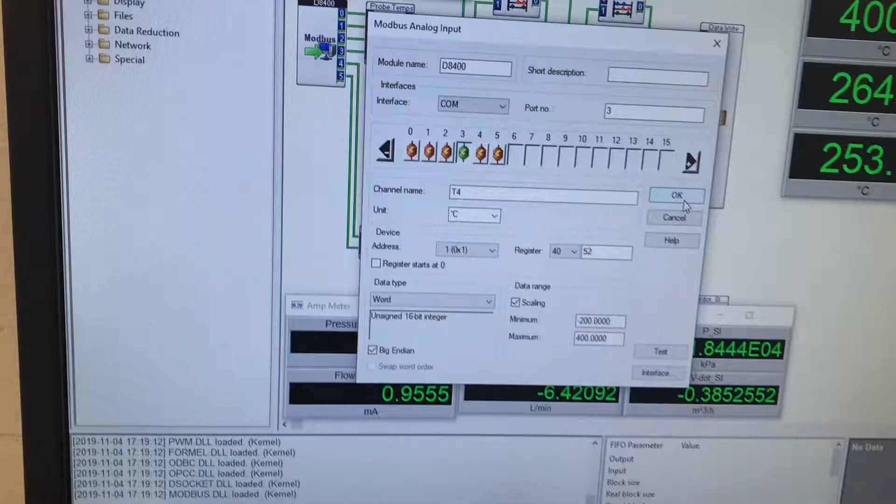Alrighty, this one is more geared towards Omega's engineers, because if you'll see here, that is what it's reading, well, what it's supposed to be reading. My thermocouples are absolutely just messed up now. They're in metal unions like that with Teflon tape. They were like that before and reading fine. I seriously do not know what is going on.

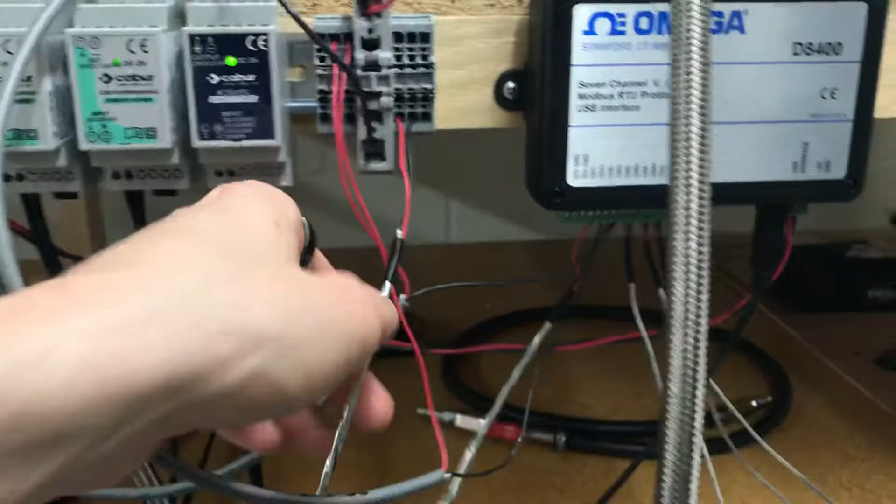This is the power supply that does my loop power. So you can see here, it's essentially got the two leads that come in, and from there it would bridge out. And this might be the issue. Like I keep saying, I'm a mechanical engineer, not an electrical engineer, but as far as my knowledge, there's one power source that these are being bridged off of in parallel. Not in series, because it's not one after the other. It's all related to the same power supply technically, but bridging off from it and then terminating at the channels like in that email.

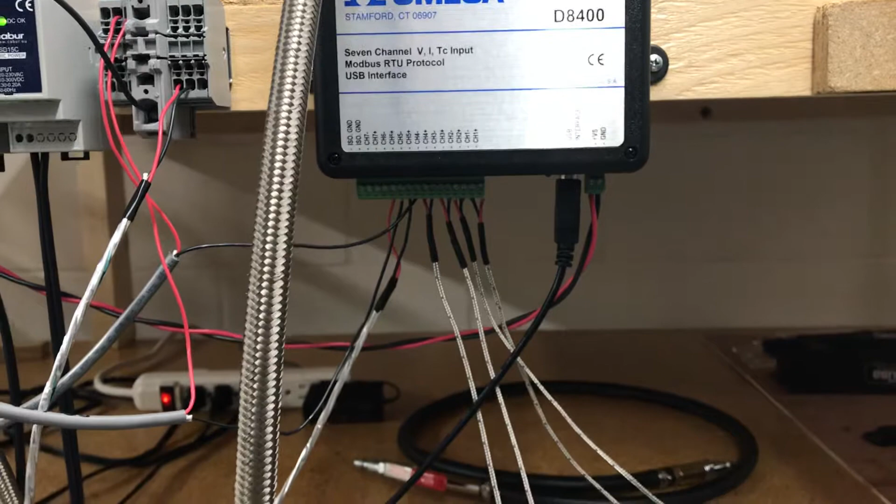Which basically, if you Google National Instruments wiring 4 to 20 milliamp in parallel, you'll find figure 5 on that article. That is pretty much what I was trying to emulate.

But still, you'll see here in a second, just some wonky stuff is happening because, as you can see here, these three are hooked up as was. Now I did take them out and put them back in because I wanted to refresh stuff, make sure the wire connections were good. You can see here I've done some debugging. Tried to just swap to see if I could get anything to happen. It's ridiculous that nothing is moving because all my values are set at full scale.

And I'm over here looking at these ridiculous instructions that don't make any sense. I mean, this is an engineer thinking through it, right? So you've got a minus 20 to positive 20 milliamp, thus your hex values, I think is what those are. So technically I've got a flow meter that'll go from 1 to 40 liters per minute within this full scale range, but really it's 4 milliamps when it starts, so that's zero, and then that's my data points I need to put in. What I've been doing, it still will not read right. This stupid stuff is unbelievable. How you can literally have a black and white instruction in here that doesn't yield a black and white result for these same instructions followed.

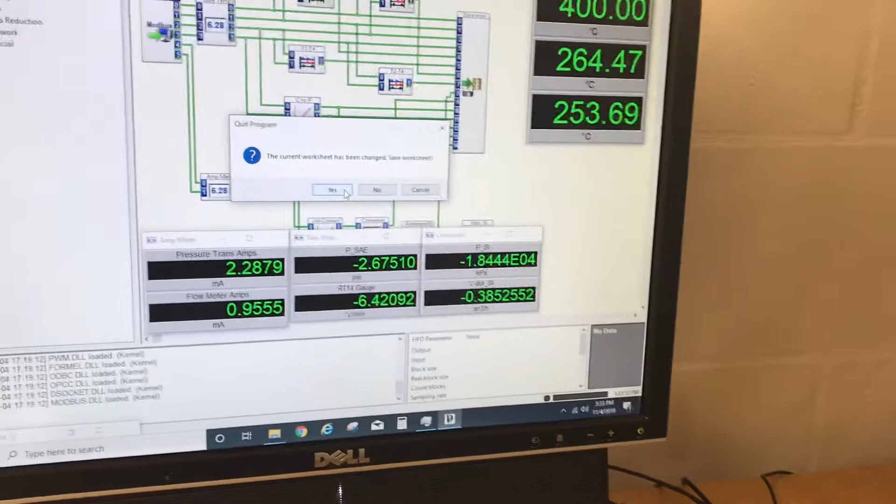Alright, so you can see here that, yeah, let me do this first. Close that, because I need to show you guys, especially for the Omega people who are going to watch this, that it's already added, it's in the correct registers and functions and slave address. For God's sakes, this is so stupid. This stuff doesn't do anything that relates to this other window that I'll show you. This doesn't work, Omega, thanks for that.

So either way, if you were to come in here, click that right here, basically you press setup to do this, but I'll show you that my computer does talk to it correctly. I had to mess with this and put it to 0, because it will not talk to your computer otherwise, which is, you know, there should be a fucking red text for that. Do excuse my French. These people who write manuals are just clueless.

So you can see that it reads setup here. Sweet, so it thinks it knows what it needs. Omega, you guys need to get on your stuff. It's a plus or minus 20 milliamp circuit. I get that you're using the 1 volt to understand the current reading, but man, what the hell, you know? What are you doing putting this in here? If it reads it, even though it's a loop power device, it's on a plus or minus 20 milliamp circuit, so this is the way I want to do it, right?

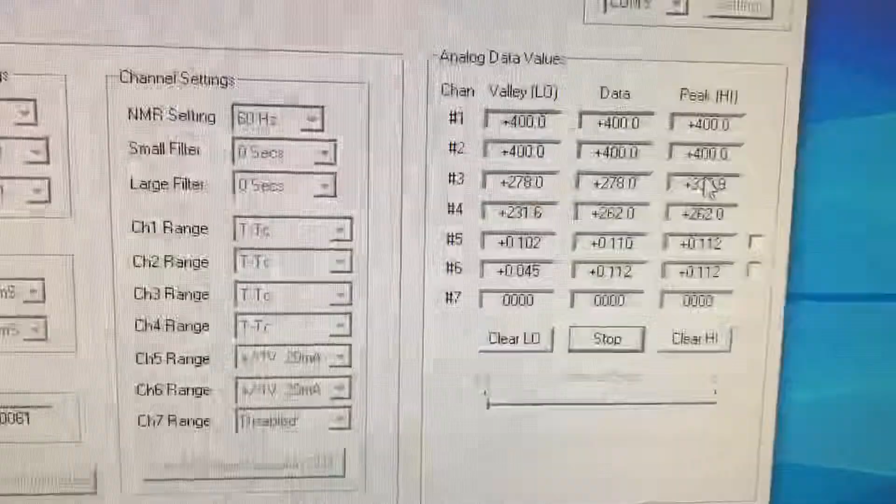So once again, we'll read the setup again. I'll show you what it reads with that. The only thing that really happens anyways is that you can curtail this. So as you can see, my thermocouple 1 and 2, now number 1 is the one where I did the swap wiring on. Number 2, no clue. Number 3, number 4, just literally no clue what those stupid piece of garbage thermocouples are doing, even though they've been put in the same freaking way. So you can see that if you check this, it sort of changes it in a sense.

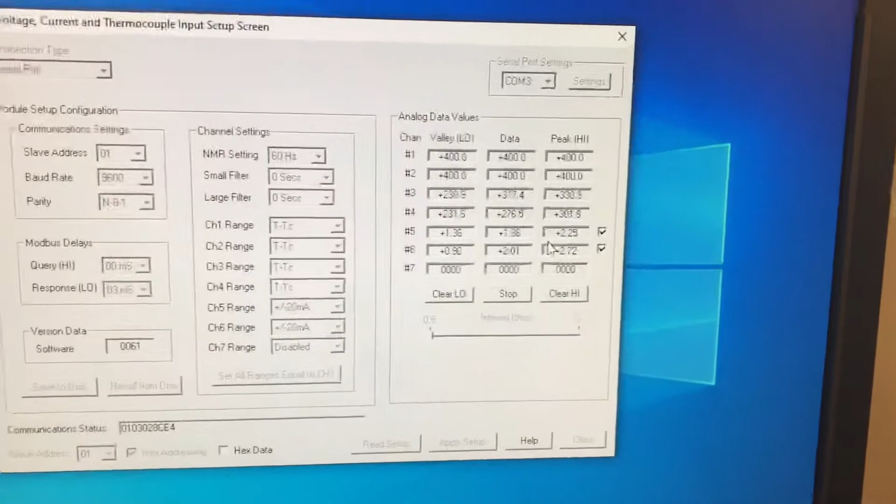See those over there, they've changed a little bit as well. So it changes this to what I would assume is the correct, because there's no instructions, because they're idiots, remember that. Well, the people who wrote it; I'm sure the people who are helping me aren't going to be idiots, because the people who wrote it hopefully got fired because they suck. But I mean, I could tell what it does, but it'd be cool to tell with the documentation anywhere, which doesn't exist because it's not on this disc.

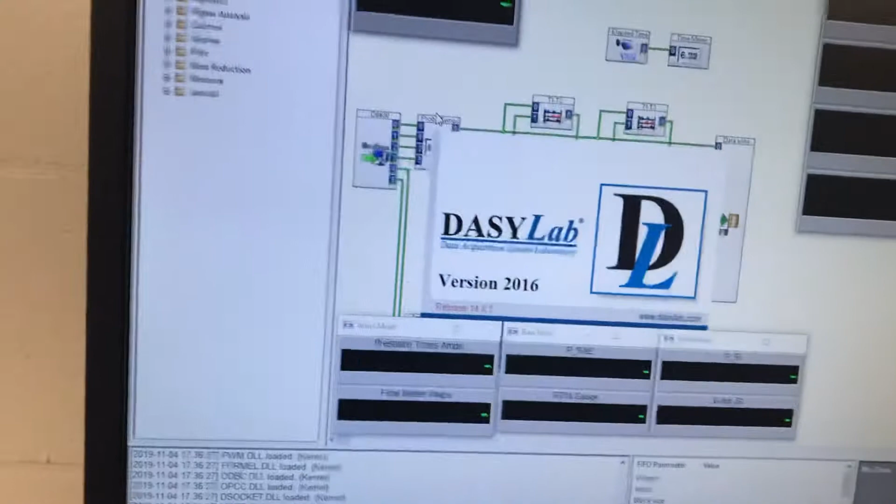Oh, man. So, you can see that it works. So, close that. Exit that. We know it's communicating correctly, right? That's not the freaking issue. So, hold on real quick. Open this up. So, alrighty, so I'll go back into here.

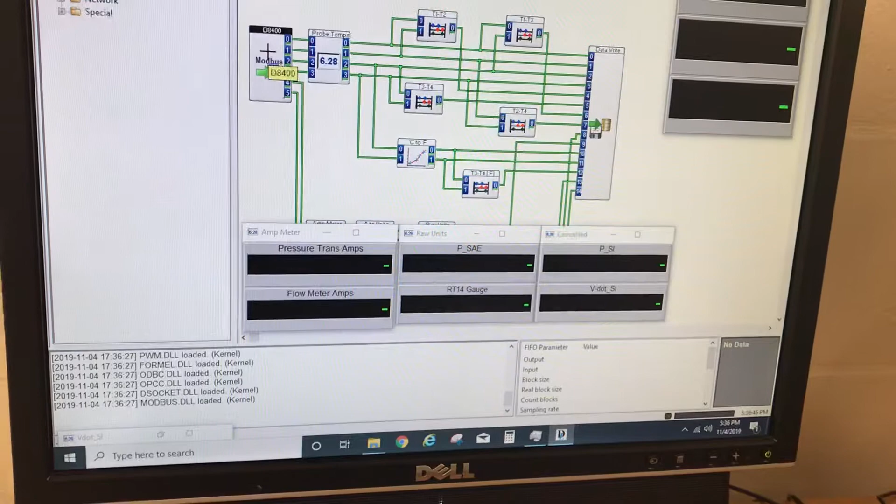You know what I forgot to, you guys probably saw it on the window, but the response rate was 0.3, or 3 milliseconds, whatever, which I can't change, which is really weird. I thought I used to be able to change that. According to this, I should be able to change that. When I put it into the program function, it just fucks off. So thanks, Omega. But your instructions, once again, are useless.

You can see here, once again, nothing crazy. Sampling rate might be a little high, but I really don't think it is, considering the fact that this is engine oil. For the figures that they were able to give, it's got 0.6 response time in water. So water is very conductive compared to oil. So I don't think that, for example, 2 hertz sampling frequency is going to be too bad. That's 2 measurements a second, if we're all following me there. So I was a little bit worried about that, but here, once again, when we come in and test, what the actual hell is going on?

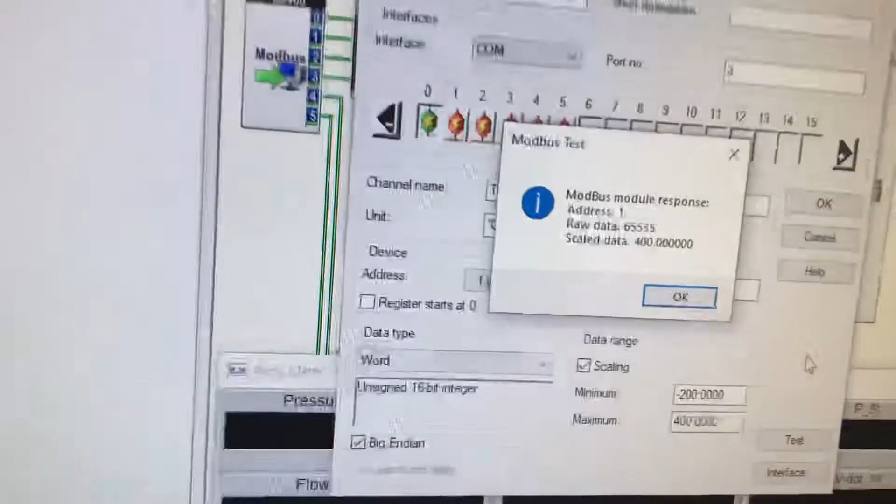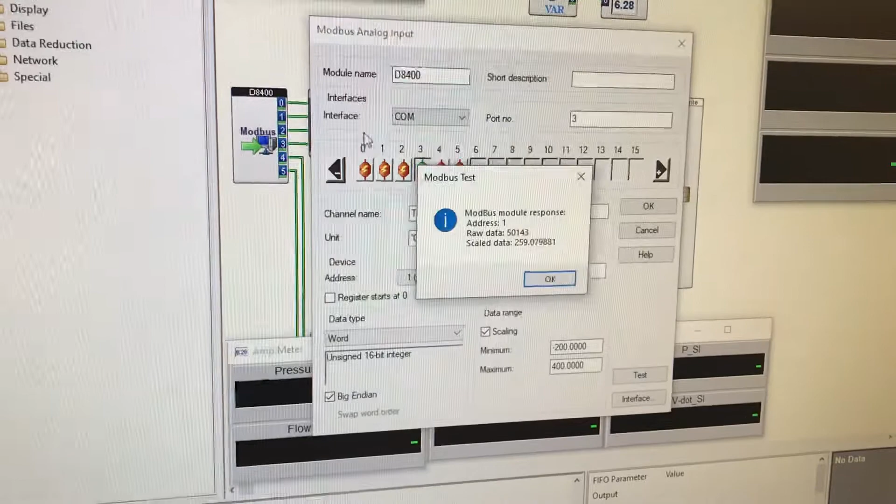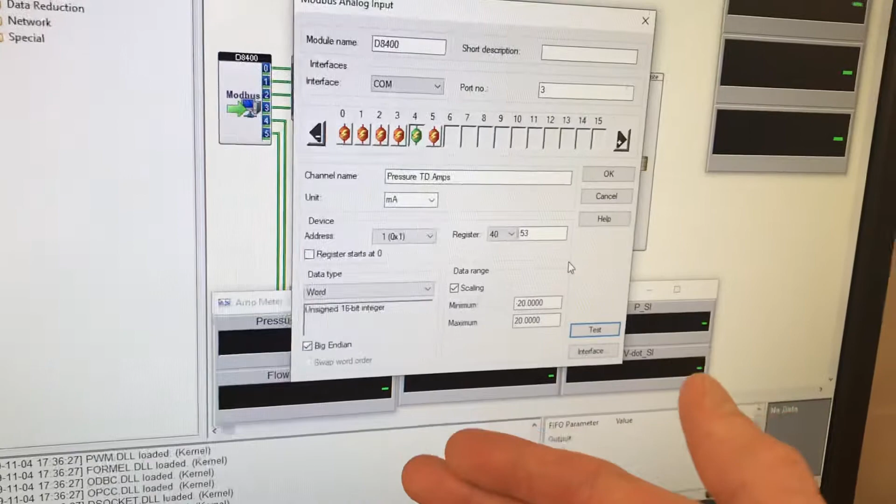So, see, once again, you can look at the raw data hex and the scale data unit maxed out for no freaking reason. And basically, if you're wondering why I'm so kerfluffled at this, see, these other ones, whoa, still really hot. Starting to at least read a different freaking temp. And then these milliamp ones, because it works on a plus or minus 20 milliamp scale, right? So how does that actually make sense? That's what I want to know. How can you put the scale in, and it doesn't give you a, like,

I know it's not being actualized right now, but look, I could turn this on. And we can test it. Of course, it's probably not going to do shit here, but look at how long it takes to get on now, too. This is way longer than it used to be. 6 seconds in, these still aren't reading. So, if you look at my amps, that's a lie, because it's turning more than it was, which was 0 before, and who knows what that's doing, because who knows if those are right.

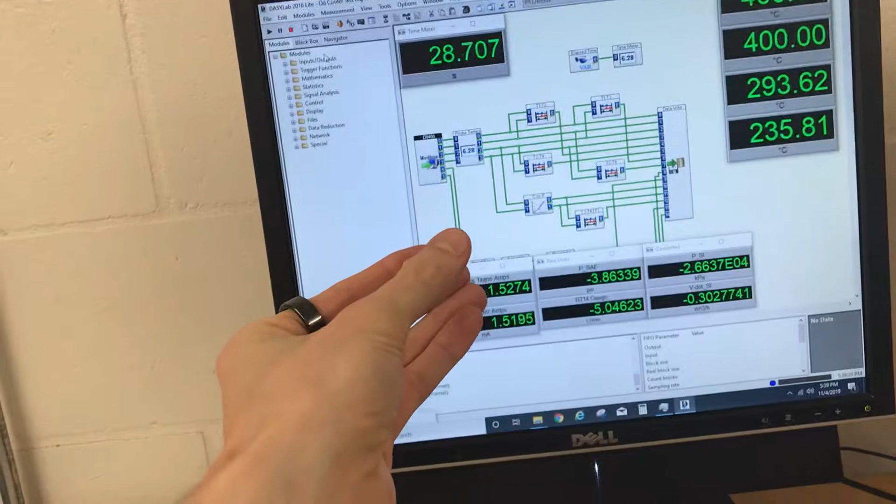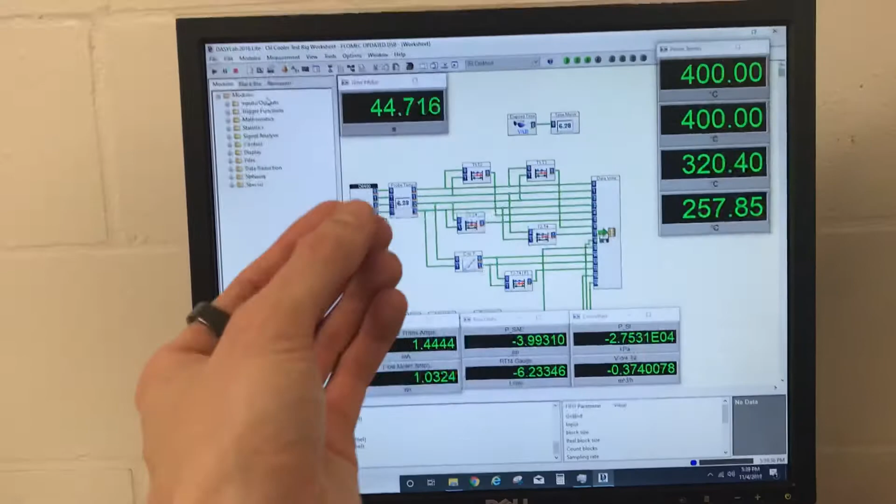Point being, though, once again, the instructions that Omega has said just suck. They suck. So, I followed black and white instructions as an engineer. I'm very freaking smart. I'm not an electrical person, but I know what the hell I'm doing if I read instructions that are well written. So, what is going on here? This is insane. Of course I have the jumpers installed. I'd have to take this off. It'd be a waste of time. But there's literally no explanation for this crap.

The thermocouples, the current, and all I did after it was working correctly was this power strip was moved from being plugged in over there to now being plugged in back over here, because that breaker is more robust and it has to handle this heater and this giant motor. I blew the breaker. The computer was still running last time. Now, the other funny part, when I was doing the experiment, every single channel pinged to max. I don't remember what the amps were doing. They're pieces of crap anyway.

So, it's unbelievable to me that anything like this is happening, because like I said, you've looked at the black and white instructions that if you follow the D8400 freaking manual are totally normal. They're all totally normal. Everything that I've done is totally normal. If I follow, where is it? The beginning section.

Oh yeah, I've got that. I've got no parity. I've got 8 data bits. I've got 1 stop bit. I've got RTS only. Handshaking is not an option, and these aren't the options either. So I don't know what the hell is going on. This is absolute bullshit that I can't do some of these things.

I don't know what is going on because I follow instructions, and of course I can't use a multimeter with one hand and show you what the voltage measurements are, but see, that's the other issue, is you would need to know the maximum voltage ratings, which are not in this, that would ping each channel to its max. So once again, I can't debug this because nothing is correctly ever set up by these large companies.

See, I'm reading all these channels. I can go and show you this too. I think I can open this up. So look, 49, that's where it starts. 50, 1, 2, 3, 4. All at register 40, which would mean that it's reading the analog inputs. And it can write those if it needs to, which obviously I've got the strings that come out and show that.

Yeah. None of this makes sense. None of it does. So, check this out. I can't do any of this because I don't have a power supply that I can control everything on. And I don't think this is my issue anyways. It's just pinging everything at max, and I don't know why. So, it'll be a learning experience for sure.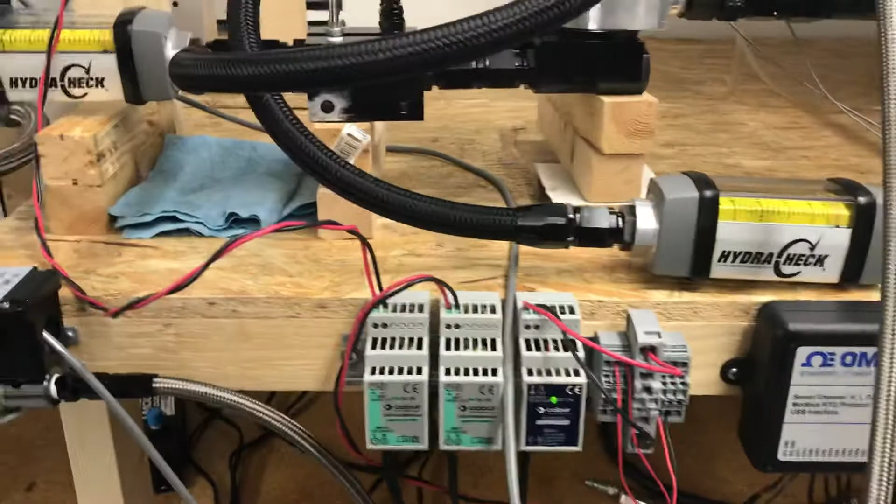Unless, for example, there was something that was missing, and it doesn't really matter because you don't have a shielded cable that goes to this anyways. So, as far as I can think about it with my expertise in this, which is just sort of evolving as we go, me choosing a 3-prong grounded plug versus the 2 that I did is going to make jack diddly difference for this issue, because that's not the issue.

There's something wrong in here, I think. It doesn't make any sense that these would be at max values, and moving the wires around does nothing. And like I said before, where I was conducting a test, everything was working as expected for the most part with the thermocouples. These loop current systems, nobody writes stuff right. It's so funny. Just tell you how to do it in one step.

It's so easy. But it just makes no sense why the thermocouple voltages would be pinging at max. And it would also make sense if I knew what the max voltage was for that thermocouple, so that, with this thing that they've set up and pre-calibrated, they would know the voltage it has to ping to do that, right? Why is that not in the fucking manual? Common sense, people. Common sense.